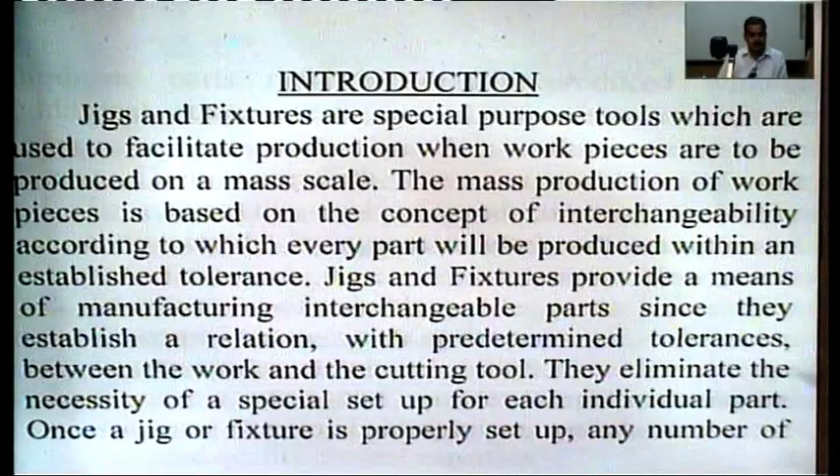Once a jig or fixture is properly set up, any number of duplicate parts may be readily produced without additional setup. Now, jigs and fixtures are used, number one, to reduce the cost of production.

Now, when we use jigs and fixtures, these help in eliminating the layout of work and setting up of tools again and again. Once the setting has been done, then production goes on. So it reduces the cost of production.

Secondly, it helps to increase the production. Third, it helps to assure high accuracy of the part, because a worker

does not set the tool and workpiece again and again. Some partially automatic operations are there when we use these jigs and fixtures. So this assures high accuracy of parts. These also help to provide for interchangeability.

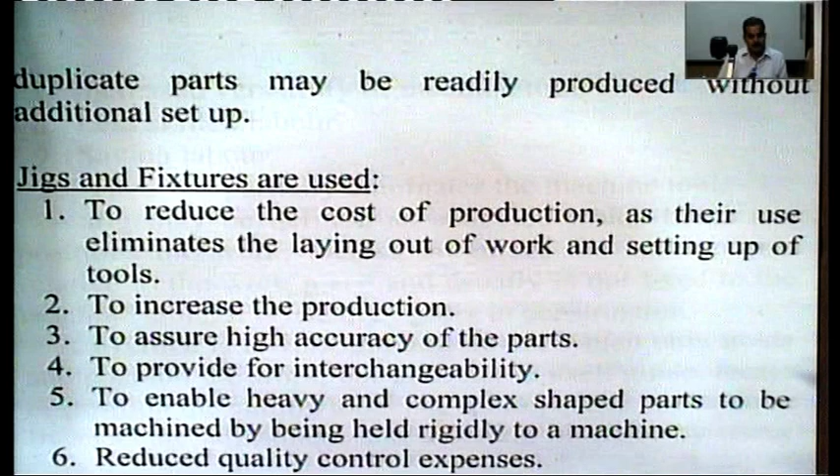Next is reduced quality control expenses. Once the jigs and fixtures have been set up, then there is very less requirement for checking its quality, because when we incorporate jigs and fixtures, the process partially becomes automatic.

Next, increased versatility of machine tools. With the help of the jigs and fixtures, a machine can be used for a number of operations instead of one or two operations. So increased versatility of the machine tool is there.

Next, less skilled labor is required, because when we incorporate jigs and fixtures, even an unskilled worker can perform machining operations, because with the incorporation of jigs and fixtures, partial automation is there.

Next, saving labor. Next, their use partially automates the machine tools. Now, let me tell you particularly what is meant by a jig and what is meant by a fixture.

A jig may be defined as a device which holds and positions the work, locates or guides the cutting tool relative to the workpiece, and usually is not fixed to the machine table. It is usually lighter in construction. So jig is a device which particularly holds and positions the workpiece, as well as locates or guides the cutting tool

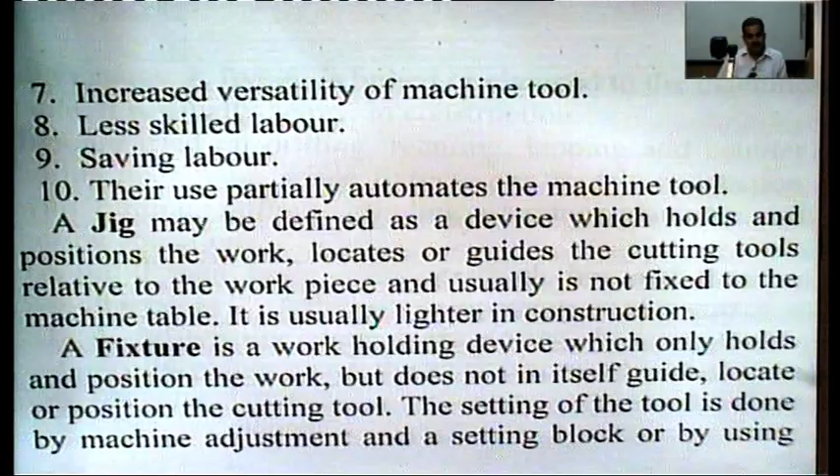In case of fixture, these tools only hold or position the work, whereas jig is a device which holds or positions the work. At the same time, these jigs locate or guide the cutting tool. The setting of the tool is done by machine adjustment and setting block, or by using slip gauges.

A fixture is bolted or clamped to the machine table. It is usually heavy in construction. Jigs are used on drilling, reaming, tapping, counterboring operations, while fixtures are used in connection with turning, milling, grinding, shaping, planing, and boring operations. So jigs are used for lighter operations, and fixtures are comparatively used for heavier operations.

And because a jig is really not clamped to the table of the machine, whereas a fixture which is heavy in construction is always clamped or bolted to the machine table.

To fulfill their basic functions, both jigs and fixtures should possess the following components or elements. So, to fulfill their basic requirements, the jigs and fixtures should have the following component parts.

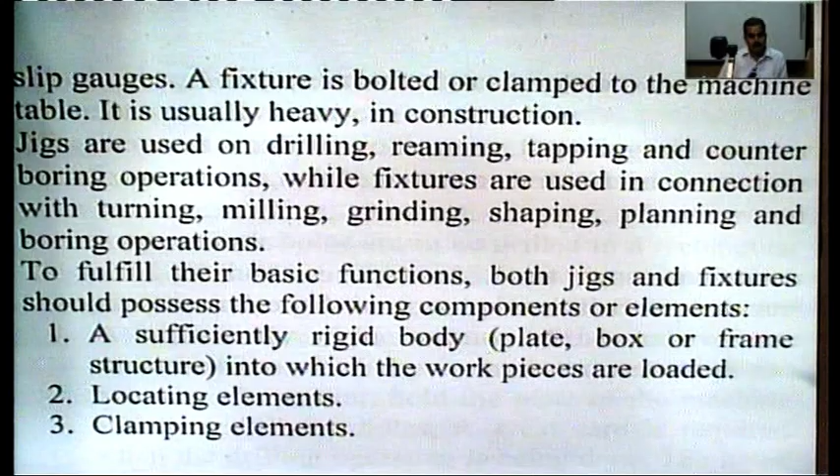It must have tool guiding elements, because in case of a jig, the tool must be guided, so it must have some guiding elements. In case of a fixture, it must have some tool setting elements, and elements for positioning or fastening the jig or fixture on the machine on which it is used.

Now let's talk clearly about the use of jigs or fixtures. Suppose 4 holes are to be drilled in a rectangular plate. What operations you require to get the 4 holes drilled in a plate are as follows.

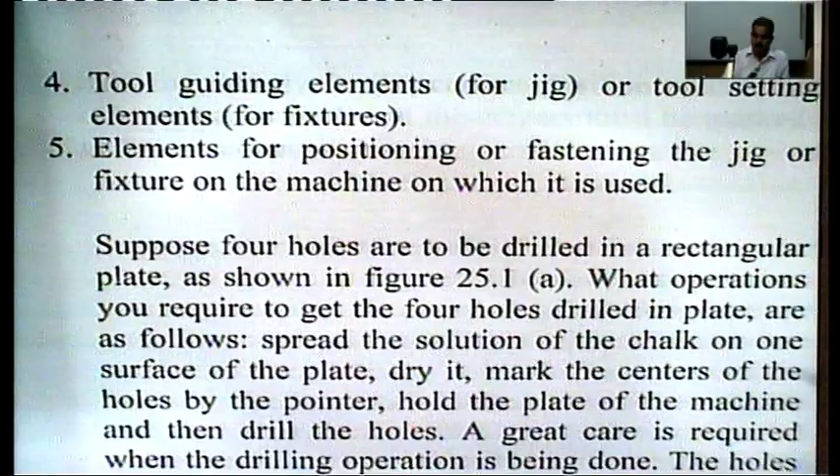First of all, we spread a solution of chalk on one surface of the plate and let it dry for some time. Then mark the centers of the holes with some pointer, then hold the plate on the machine and drill the holes. Great care is required when the drilling operation is being done. The holes must be exactly in the correct position where the centers are marked, and the centers must be marked in the correct position.

As you can see on your monitor, we have a figure of a job in which 4 holes are to be drilled. So what we do in this case, when we do not use jigs and fixtures and we are to drill 4 holes in a plate: first we apply a solution of chalk on one side of the workpiece, then centers of the holes are marked with some pointer, and this plate is brought under the drill and 4 holes are drilled one by one at the marked points.

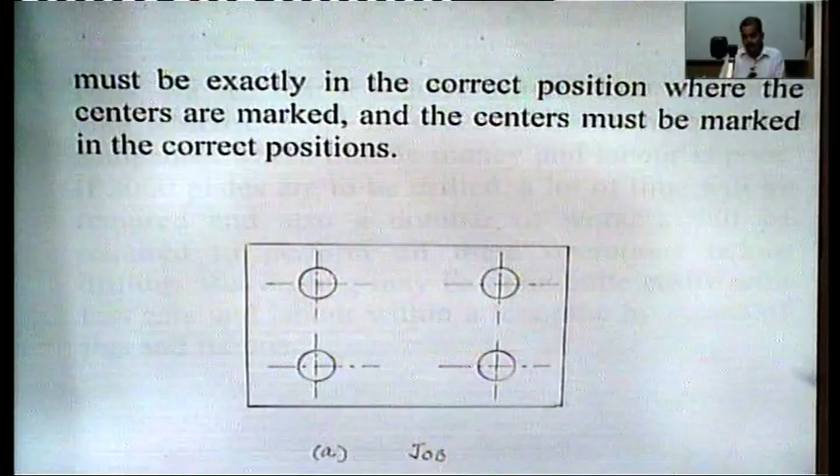So this is a very tedious process. It requires great care and more time, which cannot be given in manufacturing companies where time is money and labor is poor. Even then, it is possible if we are to produce only 1, 2, 3 or 4 plates in which 4 holes are to be drilled.

But suppose we are to produce 1000 plates, then what will happen? This particular process may not be feasible when we are to produce thousands of plates. Suppose if 2000 plates are to be drilled, a lot of time will be required and also a number of workers will be required to perform all these operations before drilling.

Drilling may be done quite easily with less care and labor within less time by means of jigs and fixtures. In case of mass production, drillings can be done with less care and within less time when we use jigs and fixtures.

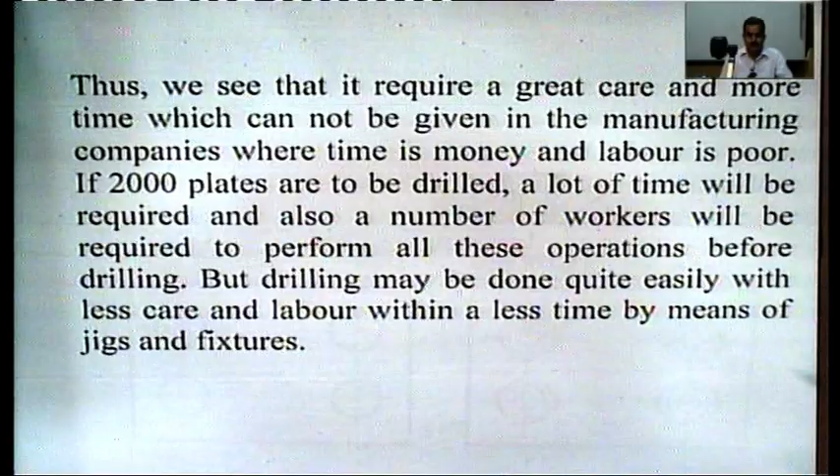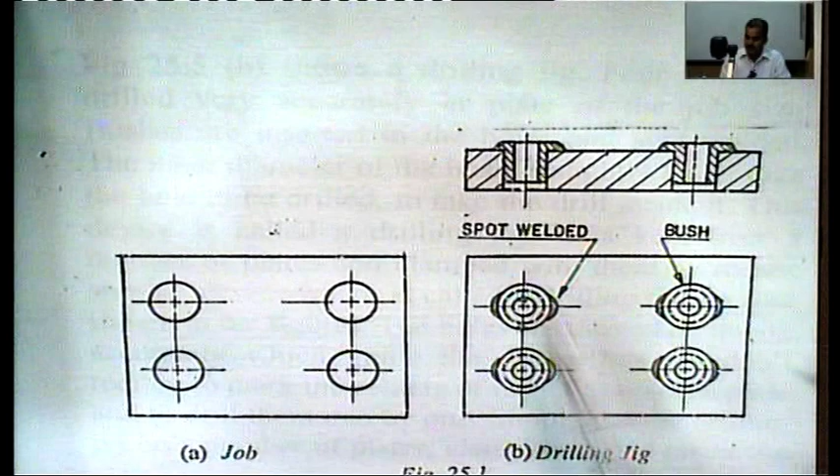Now on your monitor you can see this is our job, a rectangular job, in which 4 holes are to be drilled. For this job, we prepare a jig. This is the sectioned portion shown, and this is the top view of the jig plate. What we do, we make 4 holes,

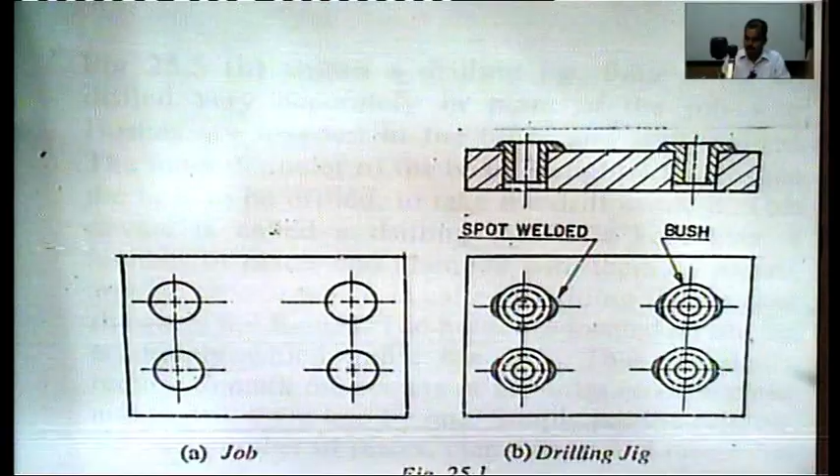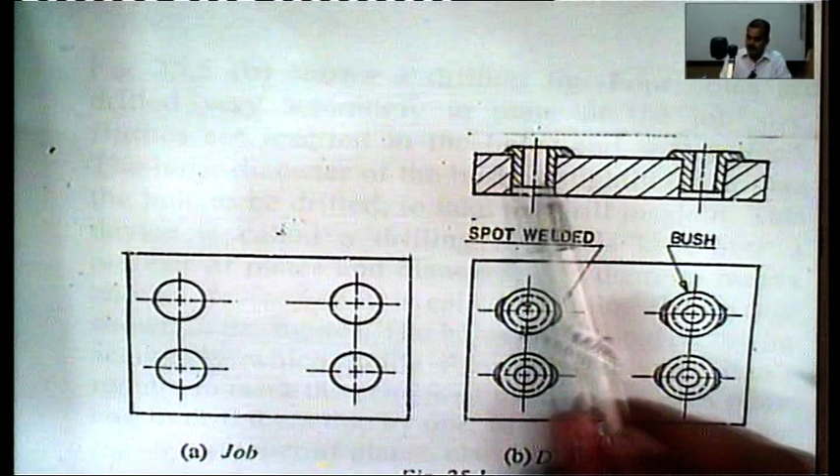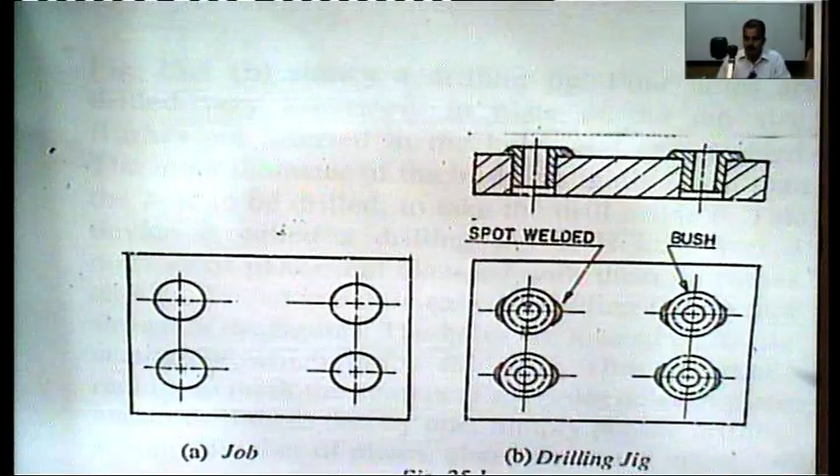similar 4 holes which are as in the job. We produce these 4 holes like this: 1, 2, 3 and 4, and in these 4 holes we insert 4 bushes. The inside diameter of the bushes should be slightly more than the holes required, so that drills can move in these holes. And these bushes are spot welded from this side as well as on this side.

As shown in the figure, 4 holes are drilled very accurately in a plate of job size. Bushes are inserted in the holes and spot welded. The inner diameter of the bush is slightly larger than the hole to be drilled, to take the drill inside. This device is called a drilling jig. It is kept over a number of plates and clamped with them by means of another device which is called a drilling fixture.

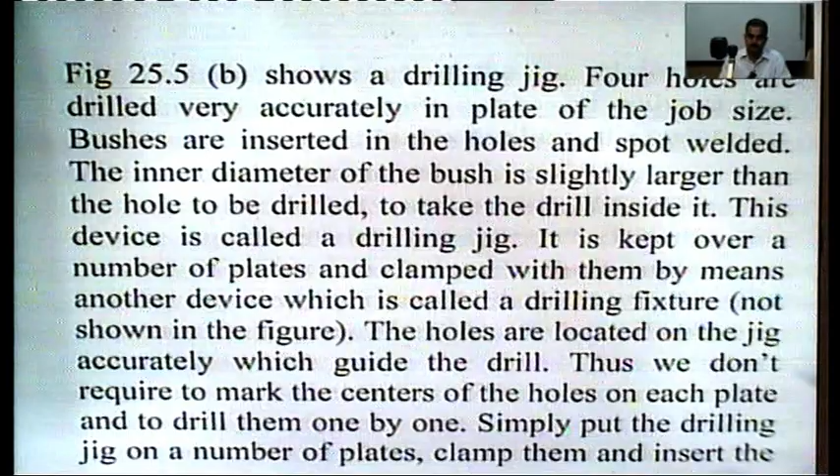The holes are located on the jig accurately, which guide the drill. Thus we do not require to mark the centers of the holes on each plate and drill them one by one. Simply put the drilling jig on a number of plates, clamp them, and insert the drill through the bushes of the jig. Holes can be drilled in 2000 plates quite easily and within less time. Hence, jigs and fixtures facilitate the operations and increase production.

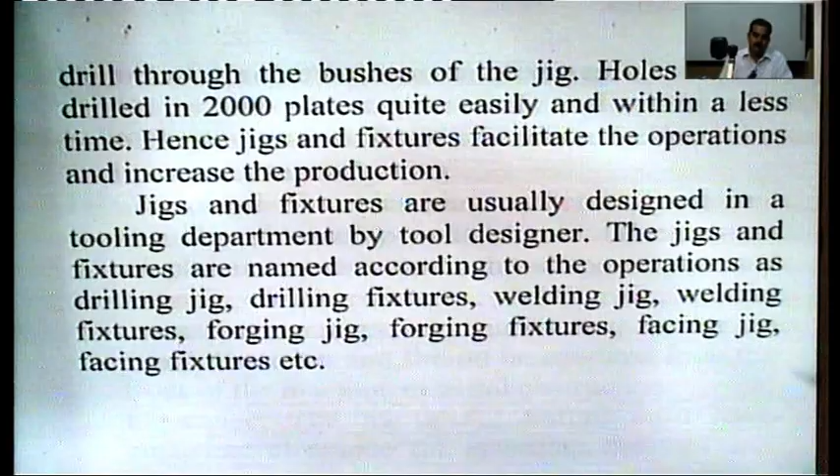Jigs and fixtures are usually designed in a tooling department by a tool designer. They are named according to the operations they perform. If there is drilling, the jig and fixture may be called a drilling jig or a drilling fixture. If they help in welding, they can be called a welding jig or welding fixture. If used in forging, they may be called a forging jig or forging fixture, facing jig or facing fixture, etc. So these jigs and fixtures are named after the operations they perform.

Now the factors of designing jigs and fixtures. What factors are there in the design of jigs and fixtures? First of all, the following factors must be considered while designing jigs and fixtures. First is clamping. Clamping means holding the job in a particular position. This clamping system of jig and fixture with the component should be easy and simple.

It depends upon the shape of the jigs and fixtures. The clamps should be placed immediately above the supporting points to avoid distortion, and should be operated from the front of the machine to avoid obstruction.

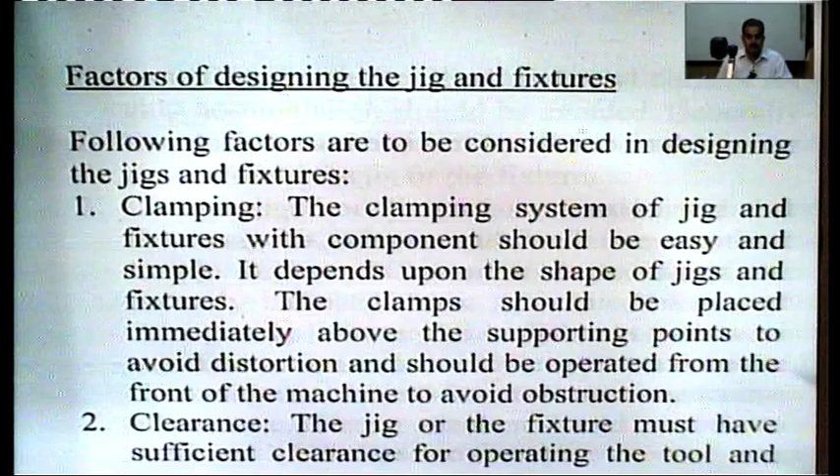Then clearance, the second factor is clearance. The jig or fixture must have sufficient clearance for operating the tools and removing the chips, so that if there is accumulation of chips, they can be removed easily.

Blind spots and corners for chip accumulation should be avoided. Generally, the chips are carried out by the coolant to clear the work and the jig or fixture. Third factor is design. Jigs and fixtures are so designed that they may be able to withstand ill uses without losing accuracy.

Swinging parts should be properly balanced. Most economical design of the jigs and fixture will be liable to take every machining operation.

And here the previous experience of designing jigs and fixture is of considerable importance. A great attention should be given to store and lift the jigs and fixture.

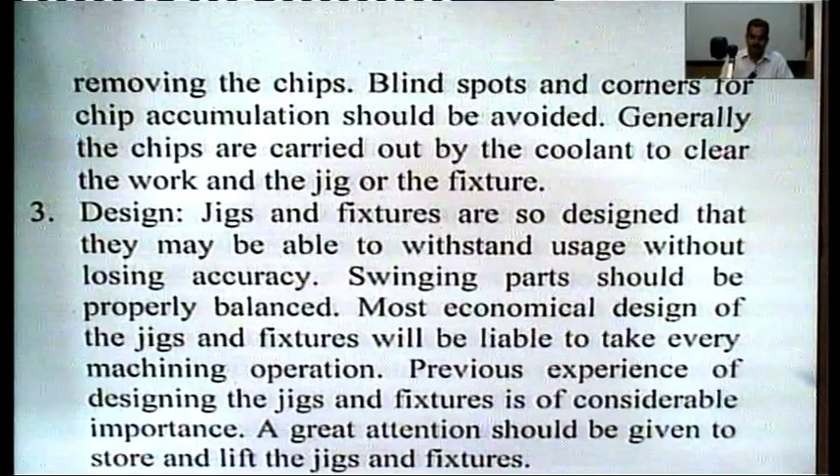The fourth point is handling of the jigs and fixtures. If the jig or fixture is of large size, then attention must be given to its weight. Heavy jigs and fixtures should have eye bolts or lifting lugs for the lifting purposes. So for carrying jigs or fixture which are heavy in nature, to carry them from one place to another, some bolts or lifting lugs should be there for their transportation.

Then fifth point is loading and unloading. Loading and unloading means loading of workpiece into the jig or fixture. If there is sufficient clearance, then loading will be comparatively easy. If there is very small clearance, then loading and unloading will be somewhat difficult. So sufficient clearance will facilitate the jigs to handle easily.

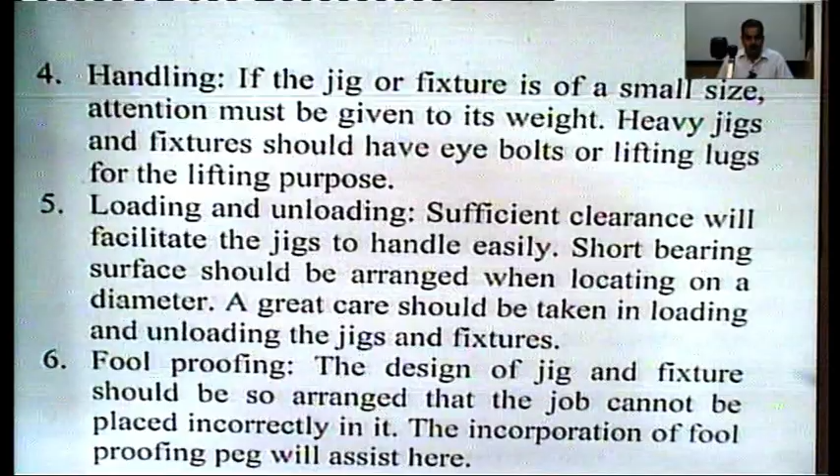Seventh point is gauge and setting blocks. There should be some provision on each jig or fixture for setting blocks and gauges when they can be usefully employed.

And eighth is locating pads. Wide bearing surface should be avoided to keep the jig and fixture free from swarf and dirt. Only a few points by which the equipment is located will permit easy cleaning. Three pinpoints are sufficient to locate the rough casting and forged surfaces.

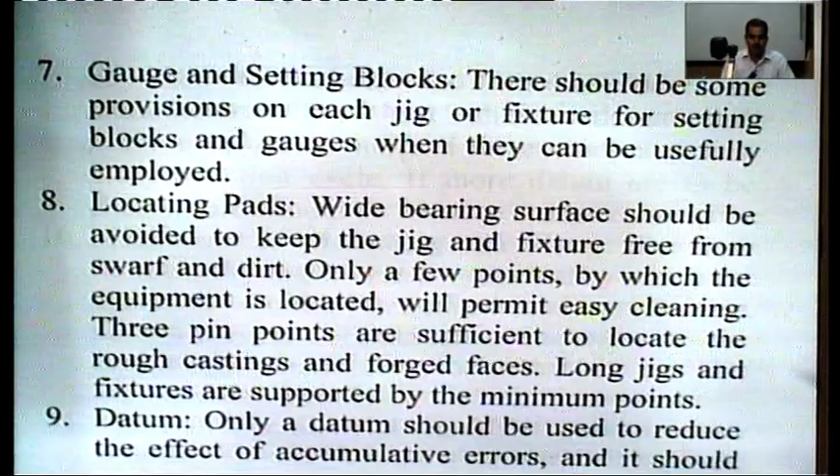Long jigs and fixtures are supported by minimum points, and the ninth point is datum. Only a datum should be used to reduce the effect of accumulative errors, and it should be used throughout the whole process of manufacture. The best chosen datum will provide sufficient material for each operation in the production cycle. If more datums are to be chosen, care should be taken to reduce errors.

10th point is machine. In designing the jigs or fixture, the machine by which they are to be operated should be studied, noting their possibilities and limitations. The size of the equipment should be such that it can be accommodated easily on the machine. So before designing the jigs and fixture, a designer must know the size of the table of the machine on which these jigs or fixture are to be clamped or placed.

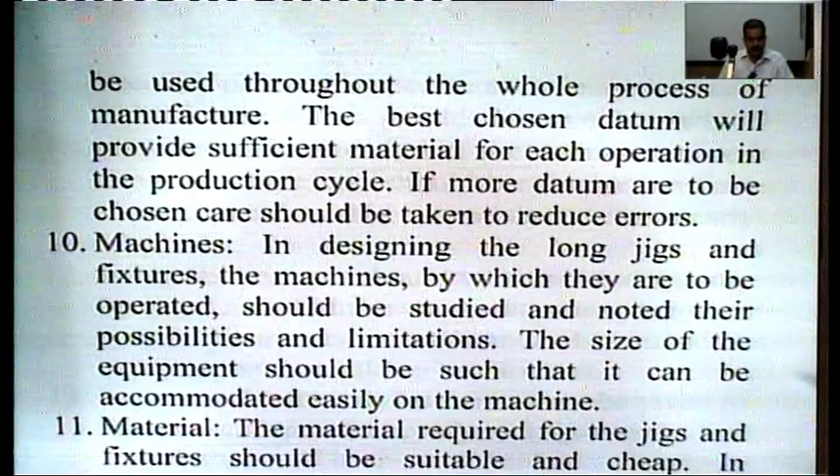And 11th point is material. The material required for the jigs and fixture should be suitable and cheap. In essential parts, special alloy may be used. Welded structure should be avoided where vibration is created during the operation; a good heavy cast iron base should be provided in such a case. Heat treated parts should be clearly noted. So, material of the jigs or fixture plays a very important role.

As I have explained already, if there are more vibrations, then welded structure is not suitable. In case of heavy vibrations, a heavy cast iron base should be provided.

And 12th point is safety. Every care should be taken in designing the jigs and fixtures to avoid the dangerous points. Sharp corners should be rounded. Holding points should be best located.

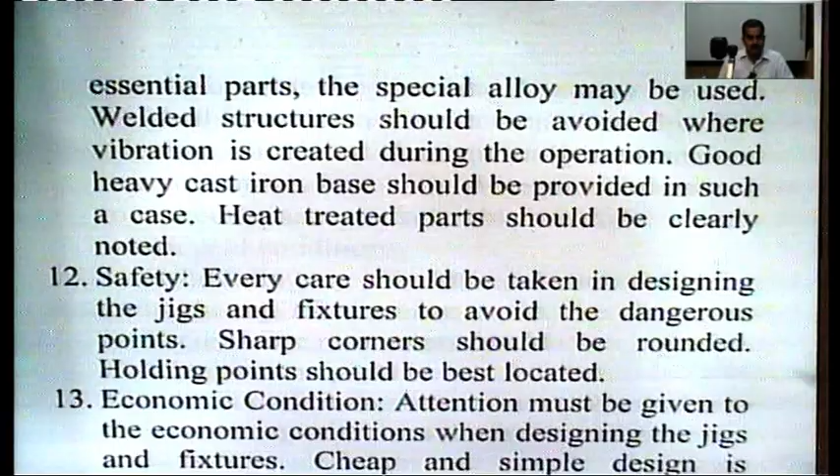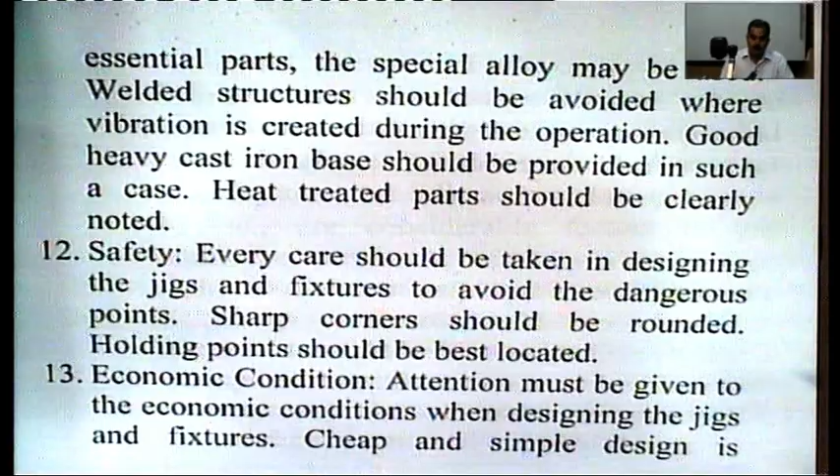Economic conditions: attention must be given to economic condition when designing the jigs and fixture. Cheap and simple design is profitable. Some jigs and fixture are so designed that a number of jobs are operated at a time. Single or multiple tools used, manual, semi-automatic or full automatic operations done, etc. are considerable factors in the economical conditions.

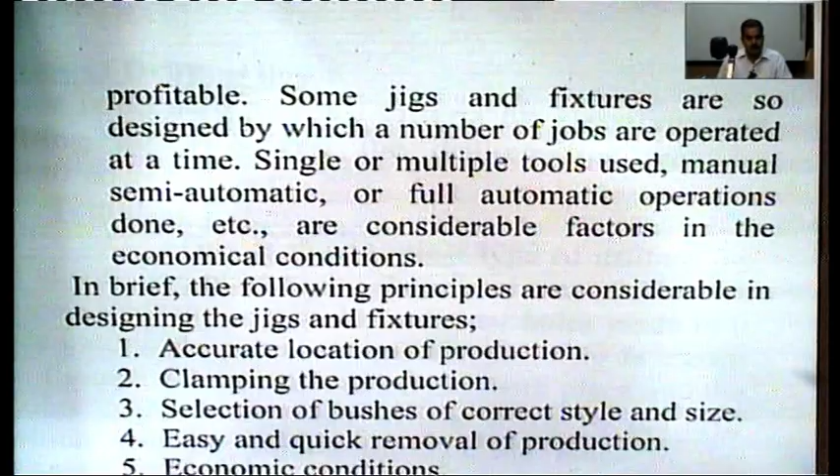So, in brief, the following principles are considerable in designing the jigs and fixture. The first point to be kept in mind is accurate location of production. Second, clamping the production. Third, selection of bushes of correct style and size. Fourth, easy and quick removal of production. Fifth point is economic conditions.

Now comes the next topic: types of drilling jigs. There is no hard and fast criteria for classifying the drilling jigs. However, the drilling jigs may be classified as follows. First of all, template jig.